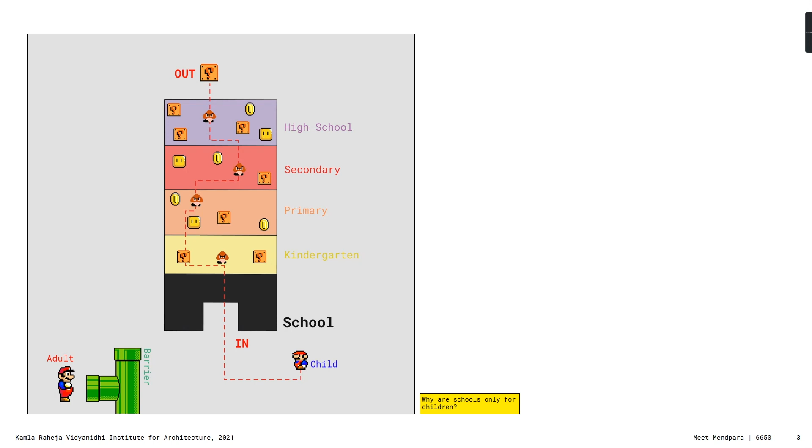The aim is to discover opportunities and access to resources that propagate curiosity to learn by turning institutions into a truly public resource. The thesis started with a question: why are schools only for children? The school is imagined as a place where everyone is supposed to go and get education, a place where you get in, pass certain stages, and get out.

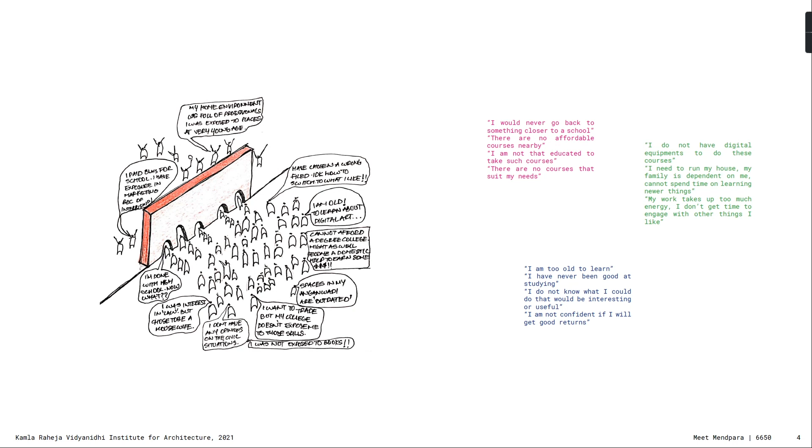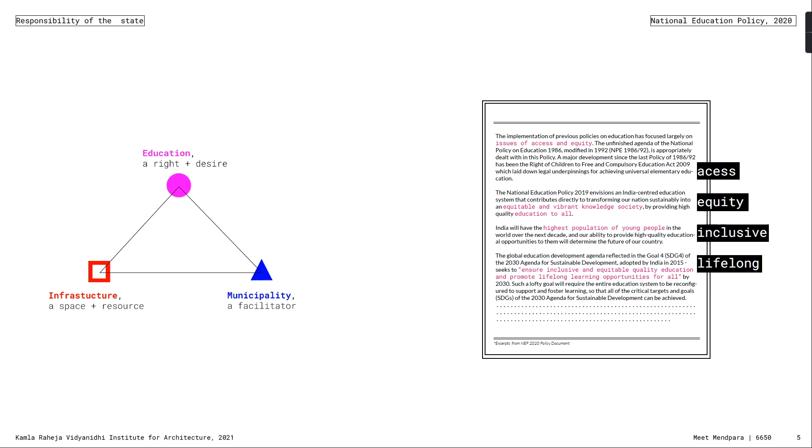The newer trend in the economy demands different ways in which we engage knowledge. While I was doing the research, the National Education Policy 2020 was announced. It basically attempts to find ways for execution at the ground level by looking at the current systems of governance.

So the municipality becomes the facilitator for providing infrastructure for learning, which currently is the public school. One important aspect taken from the policy was the idea of autonomous learning clusters formed at the scale of a neighborhood. These are imagined to be self-governing educational facilities like municipal schools, different grades of public libraries, anganwadis, and adult education centers. The facilities would be administered by the school body along with the community body, which consists of members of residents' associations, NGOs, and volunteers.

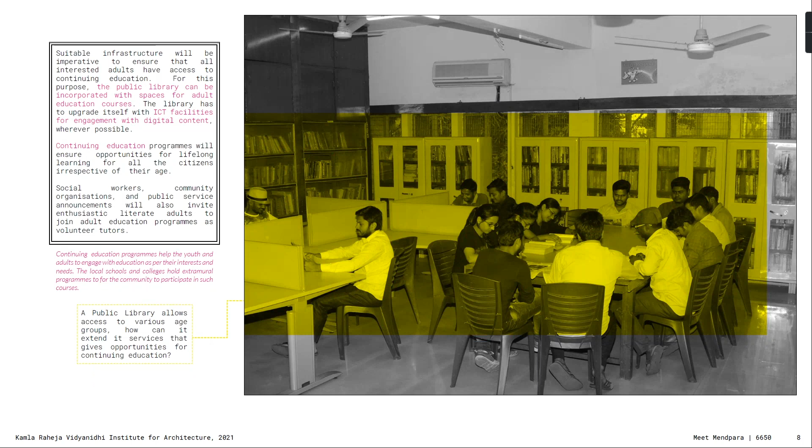As the policy further talks about the optimum utilization of these resources, how can these schools be redesigned for utilization after school hours? Similarly, as public libraries allow access to various ages, how can they extend their facilities for continuing learning programs? Basically, the policy imagines these two learning institutions to open out their boundaries to the neighborhood it's located in.

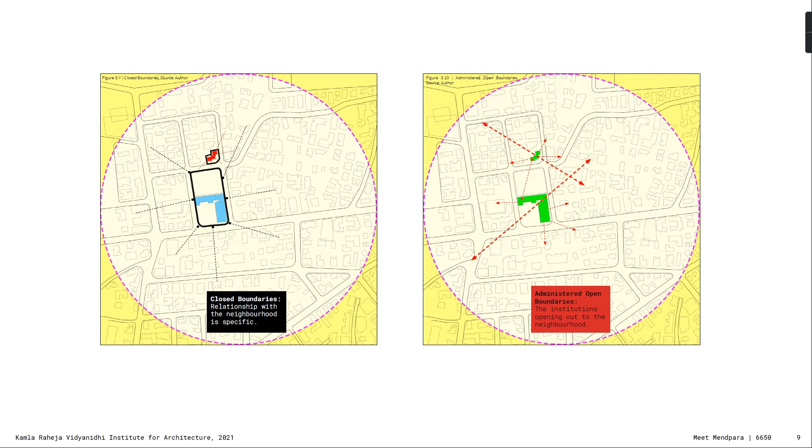Talking about the neighborhood, I started to identify these institutions in the neighborhood I reside in, a suburb in Mumbai, Vile Parle East, and documented its functioning with a critical lens.

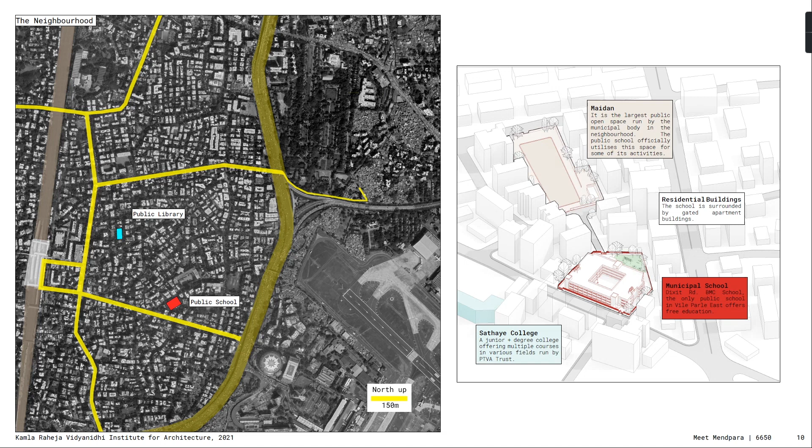The municipal school, marked in red, is the only public school in the locality, with multiple mediums of schooling within the same block. A few themes that were narrowed down were the idea of the school designed as a fortress, capsule learning, a coded machine, and the idea of power dynamics.

The school did not have any relation to the context it was located in, a series of systemic events that were carried on for a particular time frame, just like a machine.

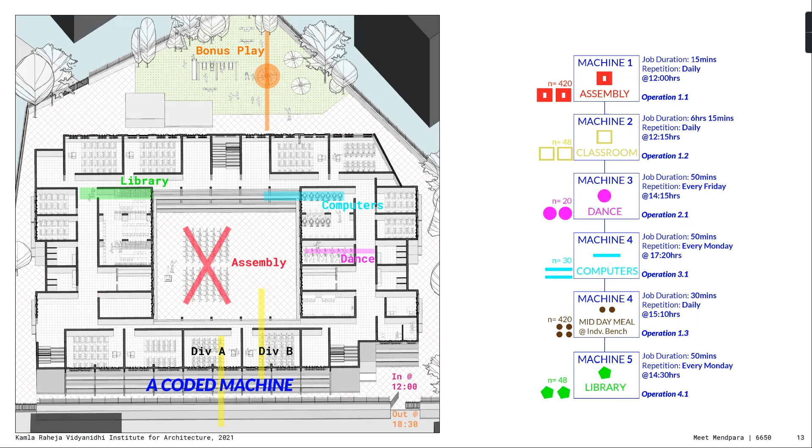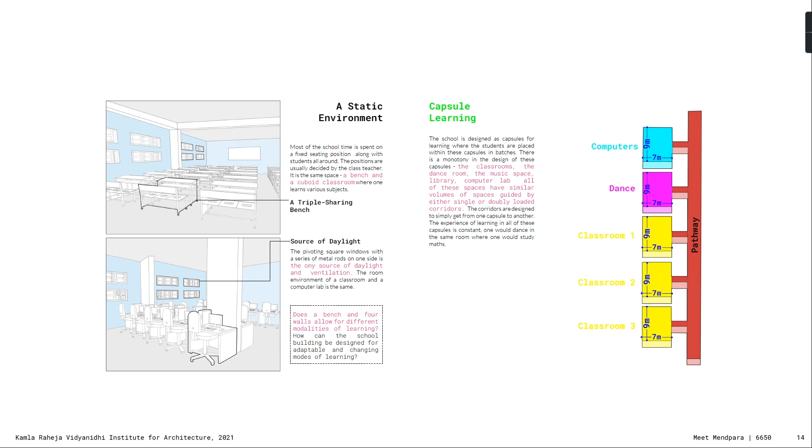The school is designed as capsules - the classroom, the dance room, the computer labs - all designed as the same monotonous space connected with a double loaded corridor. The classrooms are not designed for passive supervision but are instead always dominated by the teacher.

To conclude the study, the aim is to eliminate the divide between the municipal school and the neighborhood it's located in.

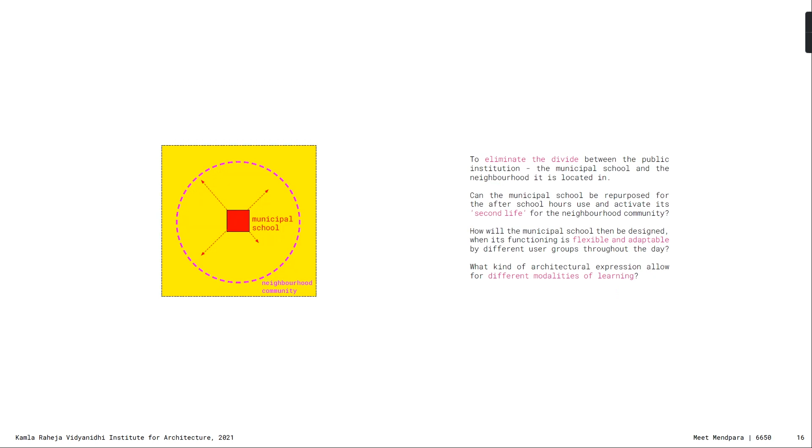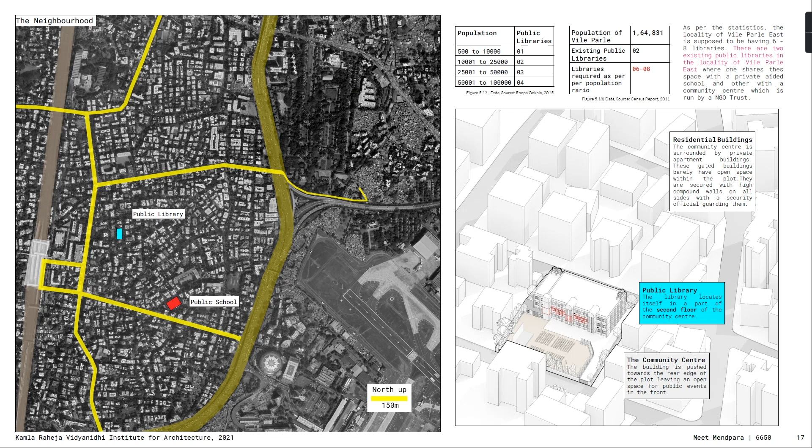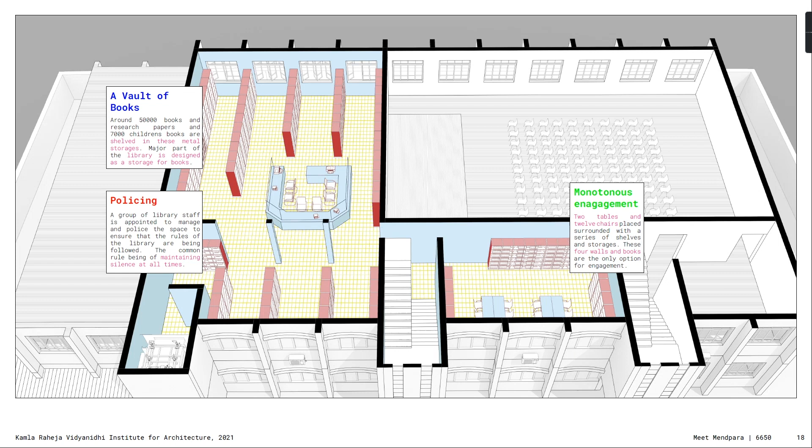The few themes narrowed down for this institution were a vault of books, where the library is designed largely like a storage space, the idea of constant policing, and finally the monotonous engagement with information. As you see, it has only one room with couple tables around, surrounded by shelves.

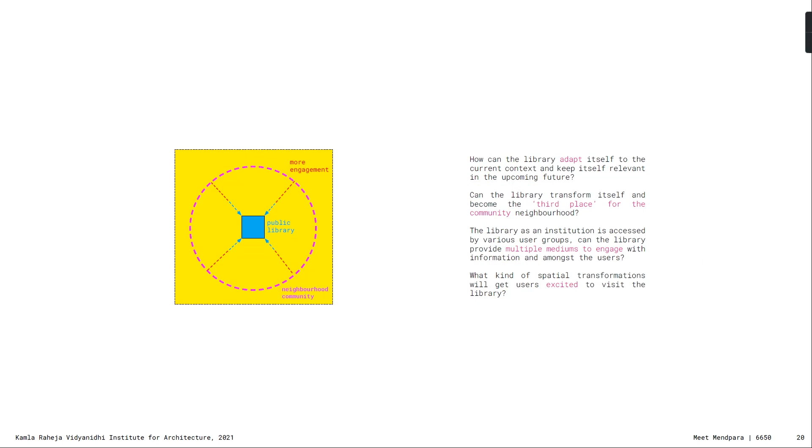So the aim is basically to transform the library to become the third place for the neighborhood, and to look at ways to keep itself relevant in the upcoming future.

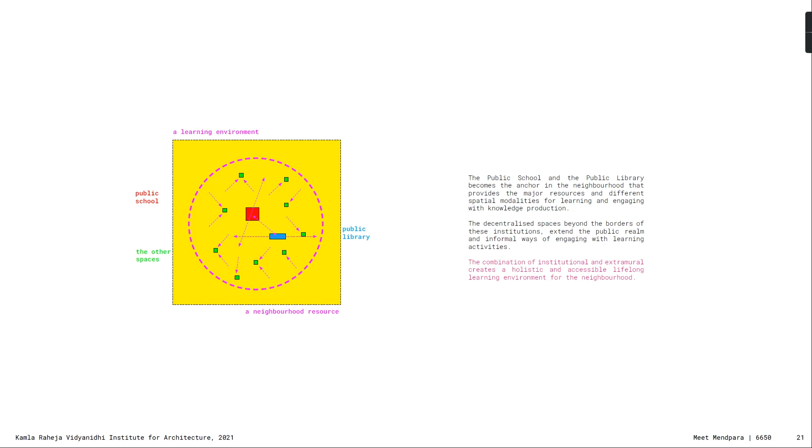Apart from these two institutions, the idea is to look at decentralized spaces beyond these institutions that extend the public realm and informal ways of engaging with learning activities. So the combination of institutional and extramural spaces creates a holistic, accessible, lifelong learning environment for the neighborhood.

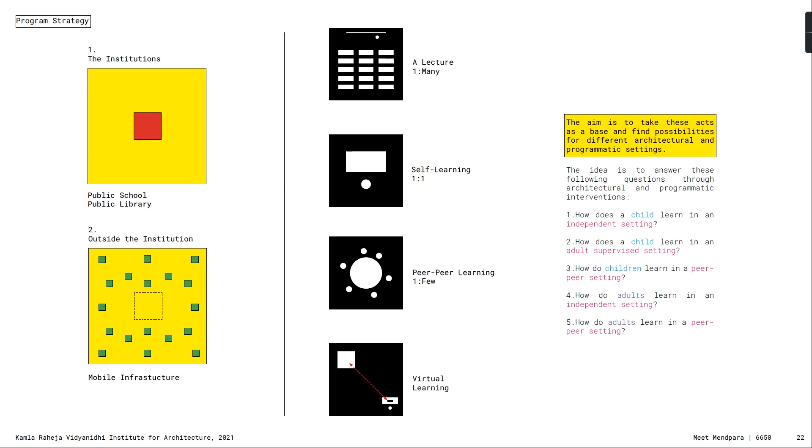The program strategy comes from the conclusions of the study that was done: one, regarding the spaces for learning, and second, the acts of learning itself.

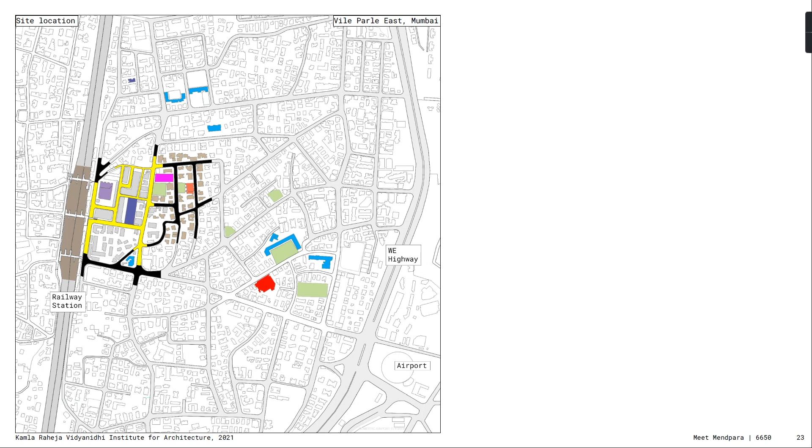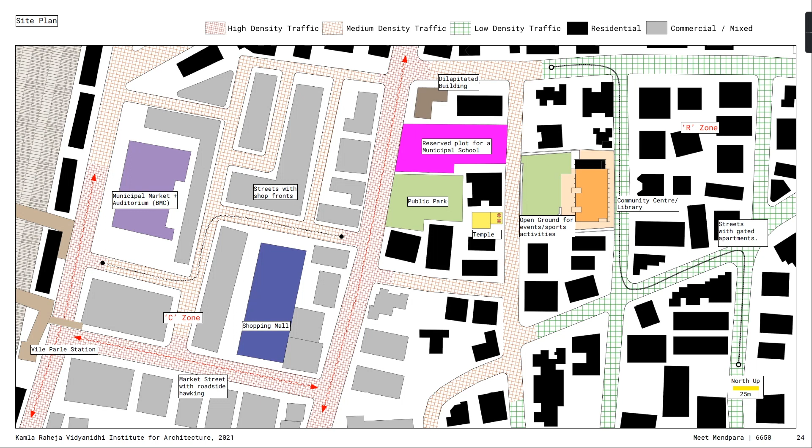It is anchored towards the railway station and the roads leading to it. The larger site context is clearly divided by the high density market street, where commercial land use is towards the station, marked in grey, and residential gated society is marked in black. The density in traffic movement reduces as one moves from the market road towards the interior roads.

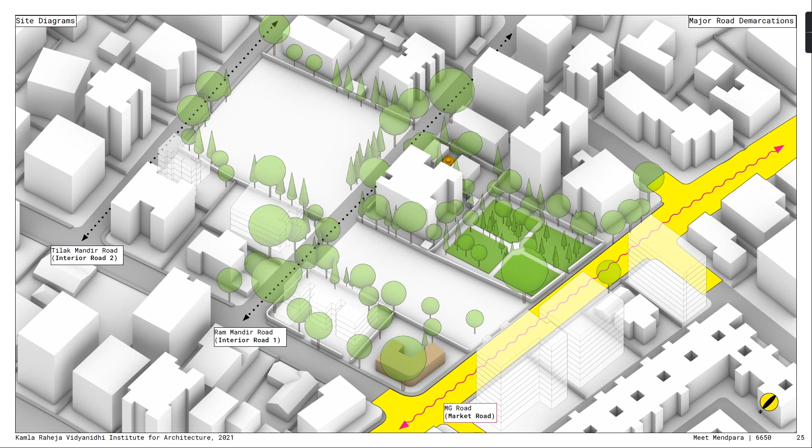Talking about the site in depth, also the orientation is changed for the diagrams. So you can see the road marked in yellow is the Market Road and the other two interior streets. The reserved plot for the municipal school is anchored along the Market Road on one side and interior road on the other. There is an existing park and the dilapidated building on the node.

The school site is surrounded by two residential buildings. Across the school site, the community center, including the public library, is located. This was the library that was studied during the research.

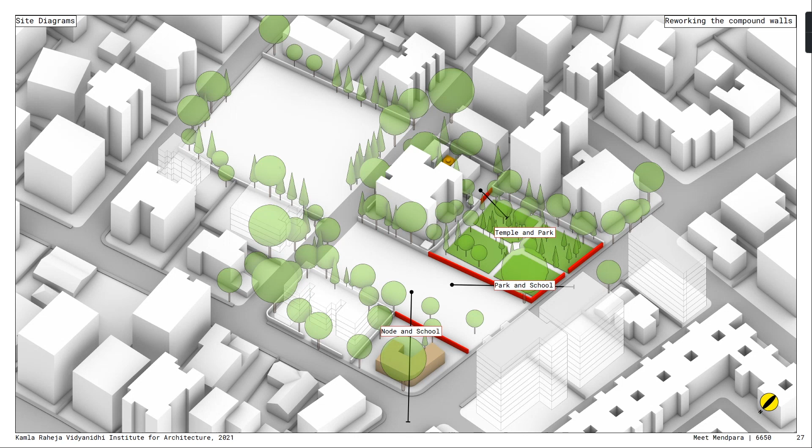Reworking on the compound walls, the idea is to create relationships from the node to the site, park to the school, and park to the temple.

The final program designations naturally happen to be the public school and the park on the plot marked in red, and public library and the existing rental halls as a part of the community center marked in blue.

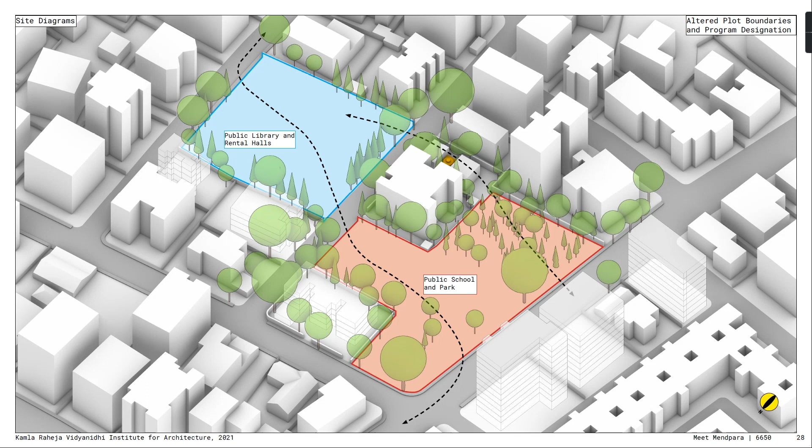The larger design move is to create a thoroughfare right from the Market Road, which cuts across two interior lanes into the residential zone. The programs are listed within three verticals: fixed, flexible, and open.

Spaces that require privacy and security, for schooling purposes, are fixed. Spaces that can be open after school hours, used by different age groups at different parts of the day and night, are the flexible ones. Spaces open for public use throughout the day are open programs.

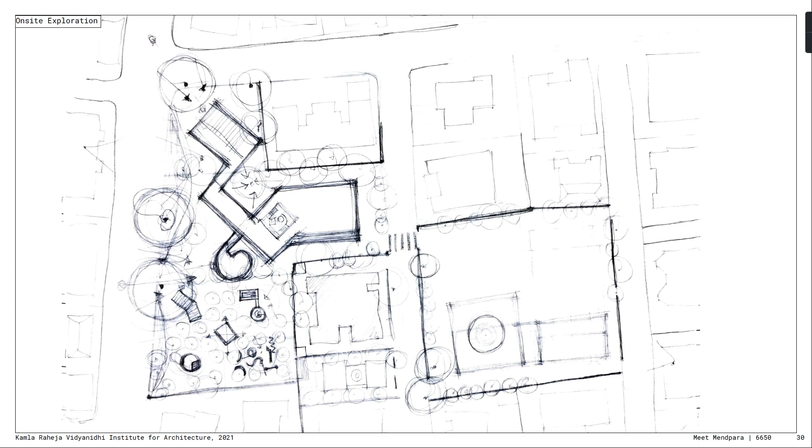Keeping the programs in mind, some on-site explorations in the form of sketches and physical models were done to understand the scale.

The idea was to basically recess the school building to the interior road with necessary setbacks while creating a public interface at the edge. This keeps a buffer between the school building and the noisy street.

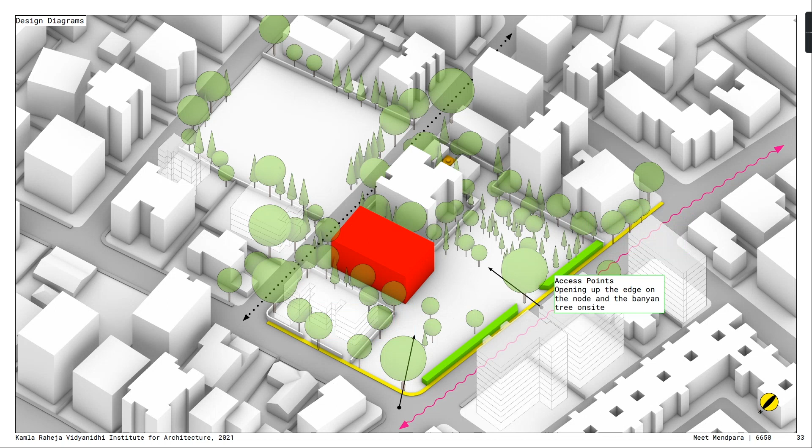Access points are opened up, one at the node and other at the huge banyan tree on site. The common program starts responding to the park on one side and the node on the other.

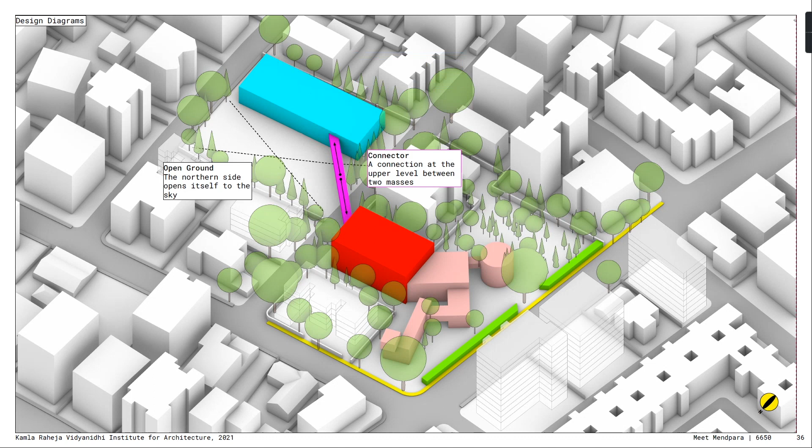For the public library, the block is aligned to the southern side of the plot, leaving the northern side open. A connection is thought out at one of the levels between the two sites, apart from ground level accessibility. Talking about the diagrams, I'll briefly talk about the larger programs in the project.

The informal hawkers on site at the edge are housed, creating a series of shop fronts accessible from the pavement.

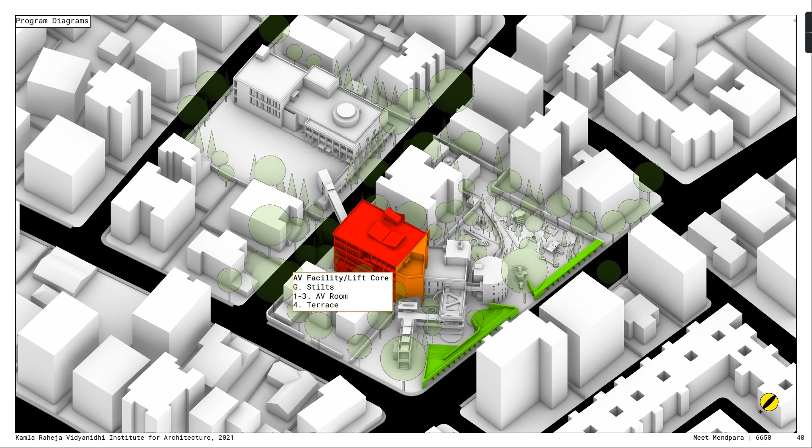The school building is sectionally divided as per the updated stages of schooling per the new educational policy, with a set of AV facilities and the lift core taking a separate bay. The commons are spaces shared by the school, like the gymkhana, canteen, children's library, labs, and an open terrace.

Anganwadi block with play school on the ground floor opening up towards the park, and on the top floor, a healthcare clinic for mothers and children.

The cyber space houses the midday meal kitchen on the ground floor, computer lab on the first, and environmental study space on the roof above.

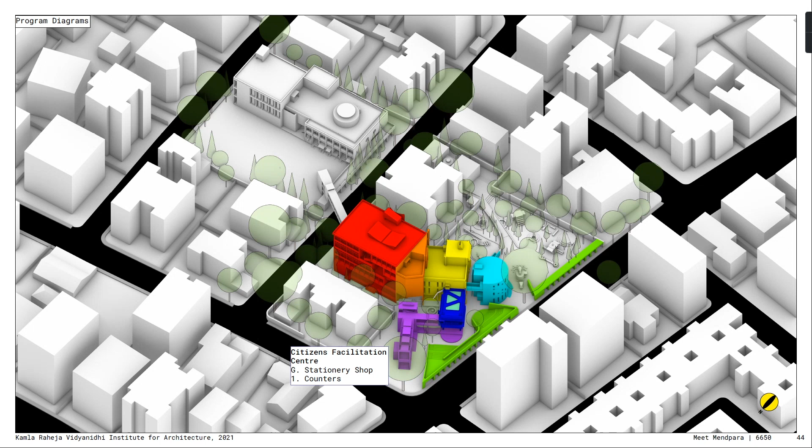Citizens Facilitation Center opens out towards the node. This program is usually at the ward offices, but the municipality also plans on making these centers more accessible for the betterment of the neighborhood.

A set of plinth work is done in the existing part for seating and a connecting ramp to the temple. A connection is made from the school to another open ground across.

It also has a walkway or a veranda that connects to the public library block. That's the public library, and three rental spaces like halls take place in the other block.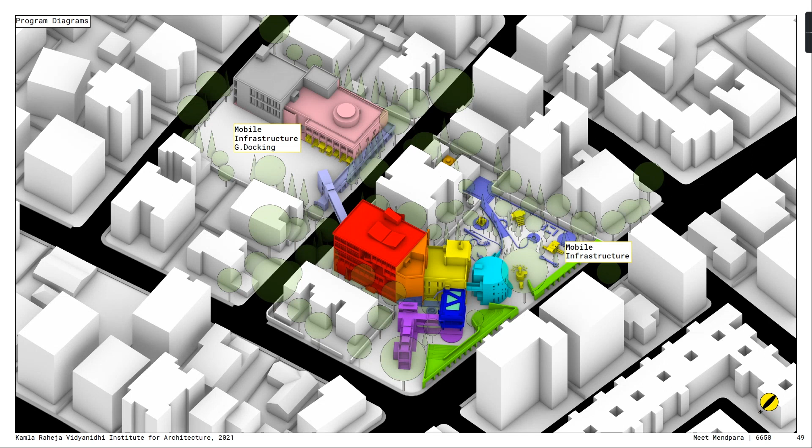The mobile infrastructure is designed to integrate itself with the facade of the public library on the ground floor, which is also seen to be placed in the park.

Talking about the plans, the orientation is north up with Market Road on the west of the plot. The shop fronts at the edge, along with amphitheaters, act as a compound wall with two large openings to the site. The ground floor is designed with a clear movement towards the public library, also in the park, along with modulation of seating and the ramp that leads to the extended plinth at the temple area. I will first focus on the school site.

The ground floor is largely stilted, and the midday meal kitchen and canteen is in the common areas open out to an internal court. At the node, there is a stationery shop along with the bicycle parking. In the Anganwadi block, the play school opens itself out into the greens and the sandpit on the other side.

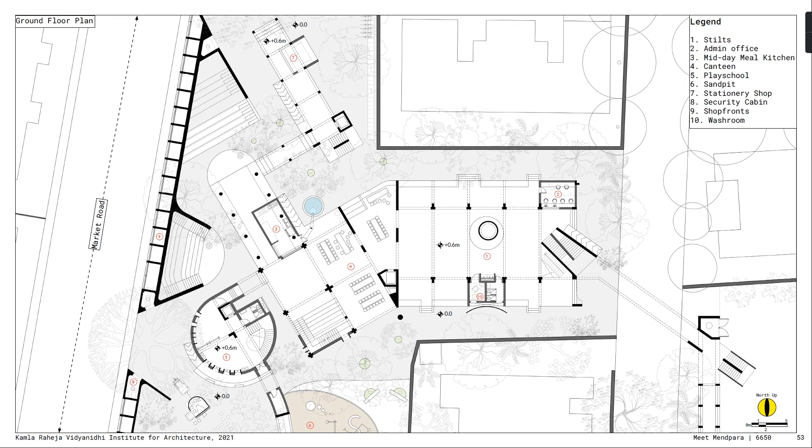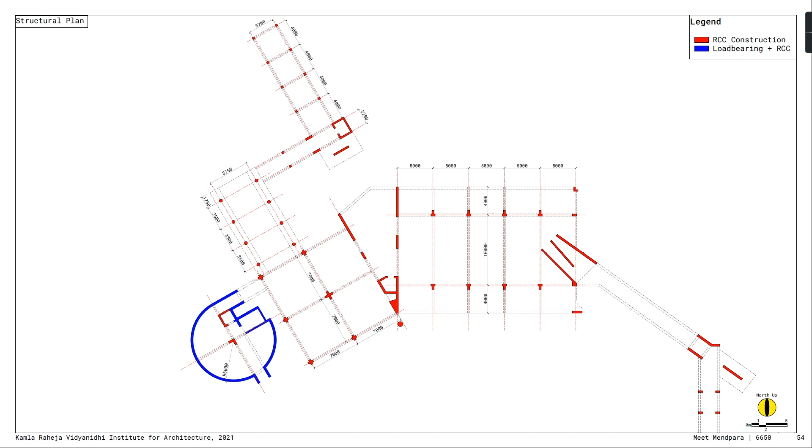Structurally, the building is divided into bays where the systems of spanning change. One in blue has a load bearing outer circular form with a column in the center to break down the span. The main school block consists of a balanced cantilever system. The AV facility at the pivot point becomes a shear construction with the heavy lift core and the fire shaft at the corner. The commons consist of plus-shaped columns with deep beams on either side. The cyber block along the EVS rooftop consists of a flat slab system with strip capitals and circular columns.

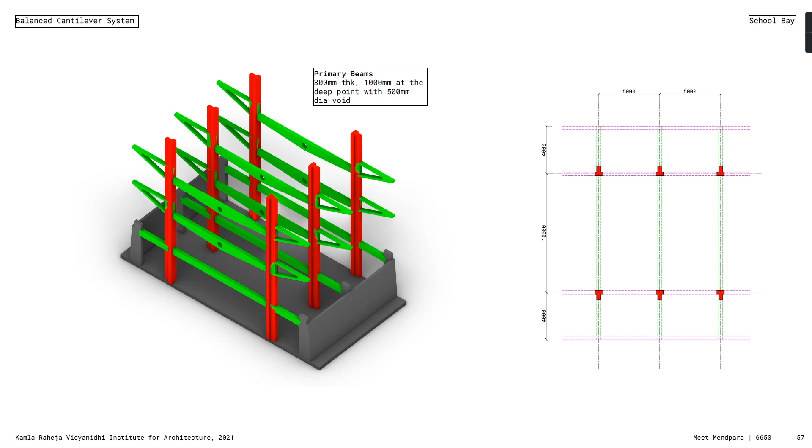Focusing on the main school structure, the foundation takes a raft footing with retaining walls. T-shaped columns help span the beams in both directions. The primary beams in RCC create a 1 meter level difference at the cantilever parts. The cantilevered areas are 4 meters on either side with a central balancing span of 10 meters. The secondary beams bind the primary ones with cross beams at both levels. RCC slabs are casted with the beams.

Coming back to the first floor plan, largely the space is used for study and other events. The children's library is imagined as a space that also opens out after school hours. The storage for books is decentralized on the floor plan as well as within the movement block at the corner. The computer lab connects itself with the CFC, that is Citizens Facilitation Center block, with a bridge. The set of counters necessary for CFC is laid out with a waiting space at the node.

Two classrooms for the foundational stage, that is the first and second standard, are placed within the Anganwadi block. The second floor houses the preparatory stage, that is classes 3 to 5. The school layout is designed in a way that alters the idea of the corridor space as just a movement function. Here, the classrooms tend to open out into the common area, which becomes a secondary space for learning and engagement. The other prominent change is in the vertical movement. Here, the staircase blocks are decentralized, so it does not become a boring continuous dog-legged staircase well.

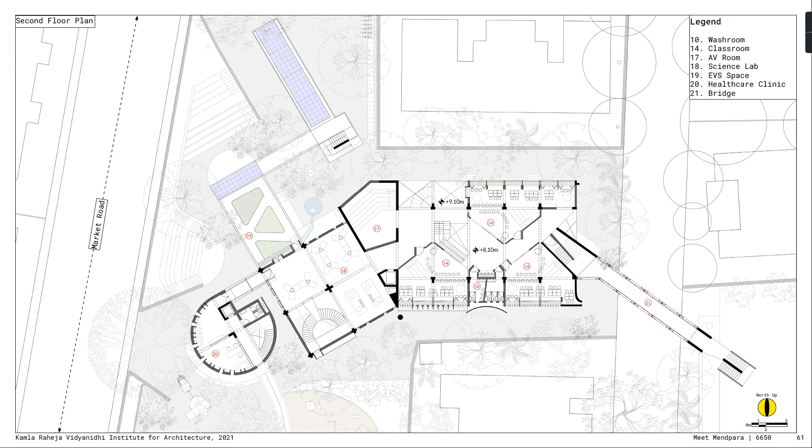The commons block holds the science labs, which opens out to the environmental study space. The water arrestor at the edge drains the water in the courtyard with a spout, whereas in the Anganwadi block it houses a clinic for inspection of children's healthcare. The bridge on the right connects to the site across.

The third floor plan houses classrooms for the middle stage, that is 6 to 8. This floor opens itself to the terraces of the common block and an outdoor seating space, learning space towards the east, which overlooks the playground. As a design decision, the larger spaces are placed on the south face of the building, where double heights and large openings are attempted towards the north.

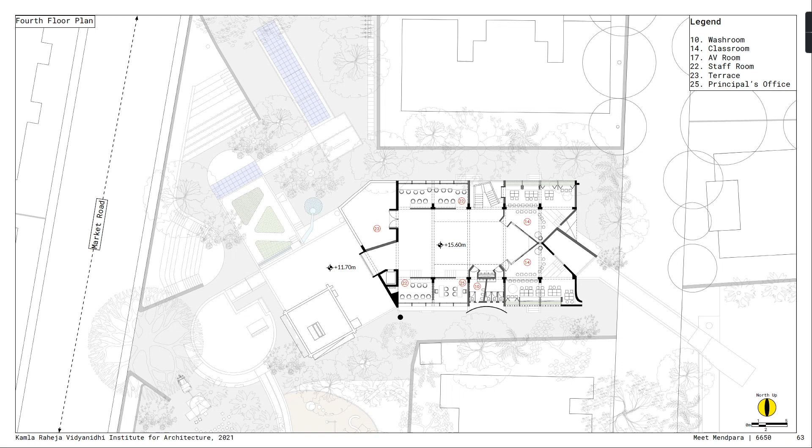The last floor houses two classrooms for the secondary stage, that is 9th and 10th. The faculty rooms along with the principal's office are located at this level. The central space is left for assemblies with modulation with the roof that gets indirect east and west light. The underground level is designed for gymkhana and study areas that can be opened after school hours. The central space with a circular light is left open with temporary furniture which can be transformed as per requirement.

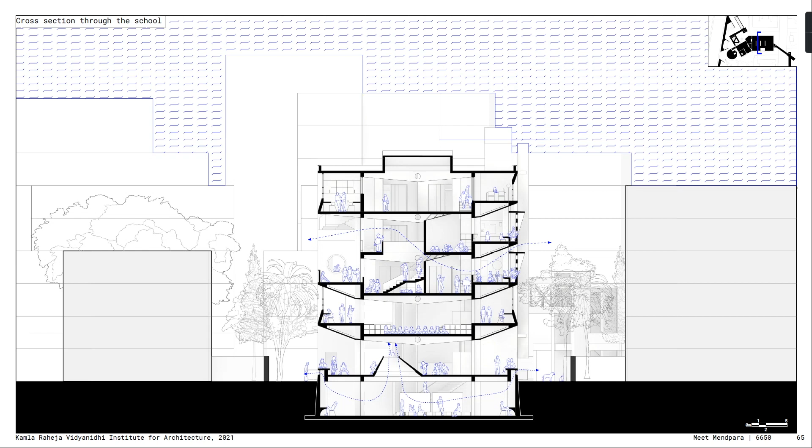So this is the cross section cutting through the school block with a series of openings towards the north face and north-south cross ventilation. The plinth edge is detailed to accommodate the ventilators for the underground space as well as the seating for the canteen at the plinth level.

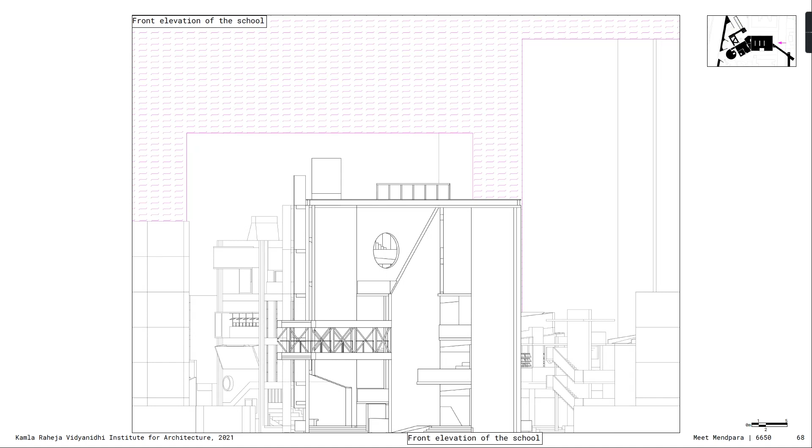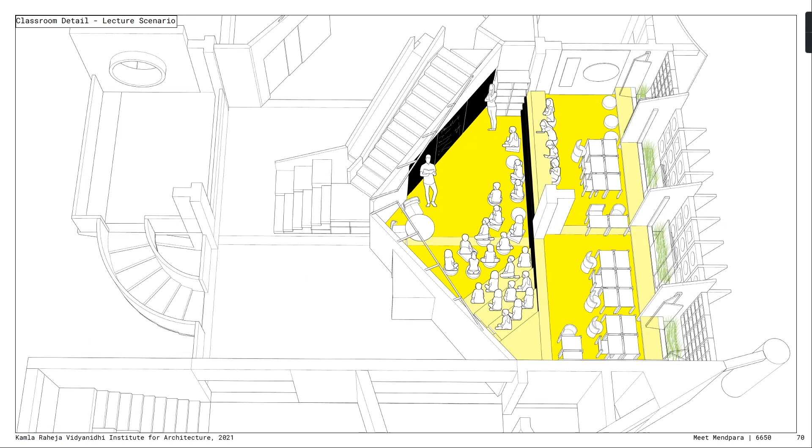This shows the functioning of a classroom, which is a lecture scenario. This is the work scenario towards the window with movable furniture. And the secondary space gets taken over during the recess hours.

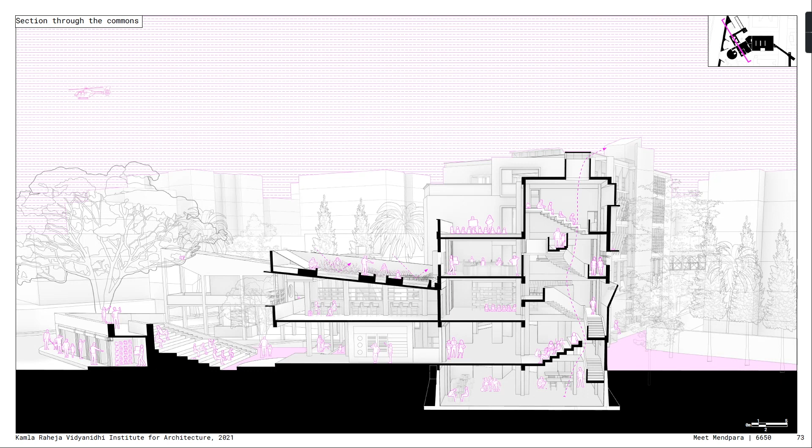This drawing cuts across the common functions, showing the edge that accommodates shops, the amphitheater, the canteen, computer block, the green roof for EVS, and the block for vertical movement.

This is the detail of the cyber block with flat slab construction, where on the upper floor the capital strip upturns and accommodates the soil within.

In the courtyard, the water collection area keeps the courtyard cool, where the water further leads to the filter bed and the rainwater harvesting tank.

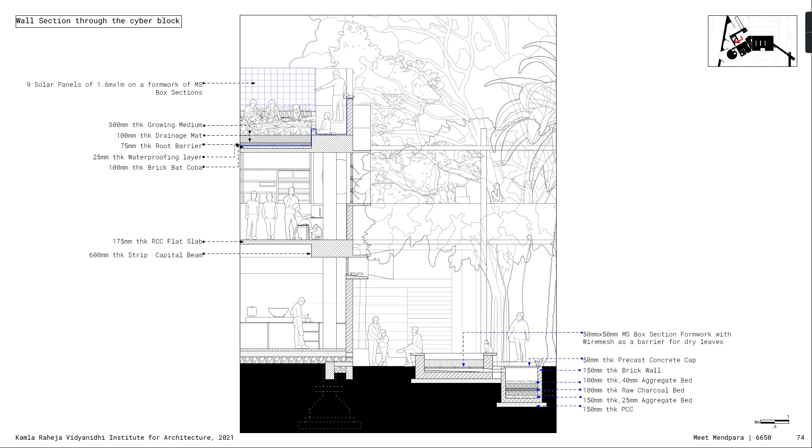Talking about the vertical movement at the corner of the common block, it creates different pause points at landings where informal activities could take place.

The openings overlook the park, framing the trees at foliage level, with some large windows becoming storage for books. The top shaft with the louvers allows hot air to escape.

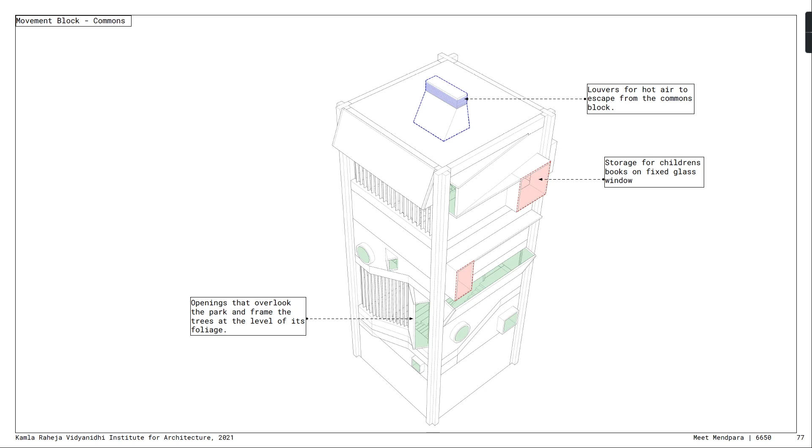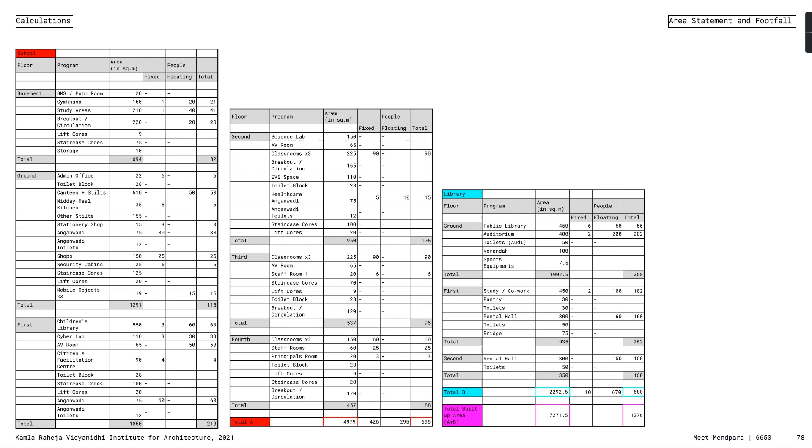The built up of the site is around 4,900 square meters, which is the school site, and the final built up of library and school both together comes up to 7250 square meters.

The solar panels are placed on two roofs that suffice almost the entire energy requirement of the school building. This plan indicates the rainwater harvesting and drainage.

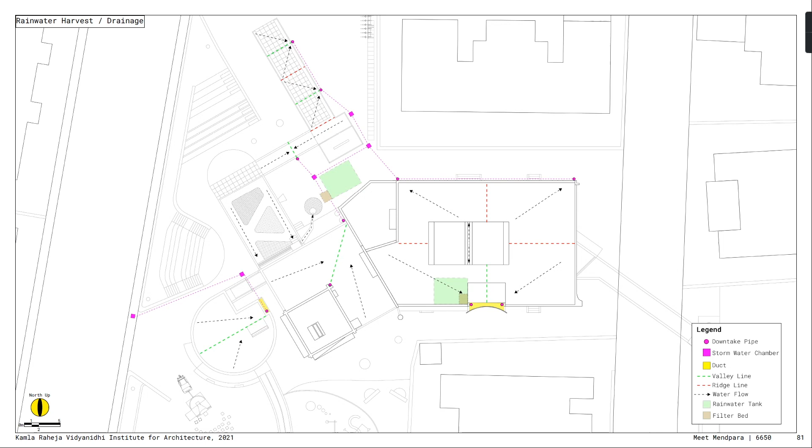Now, talking about the public library across the road, the library is designed in a way where the 9 meter circular spiral movement block, which holds the shelves for the books, the staircase, and the seating, is accommodated within.

A small lecture space descends down with a series of steps. The entrance to the auditorium is from the east.

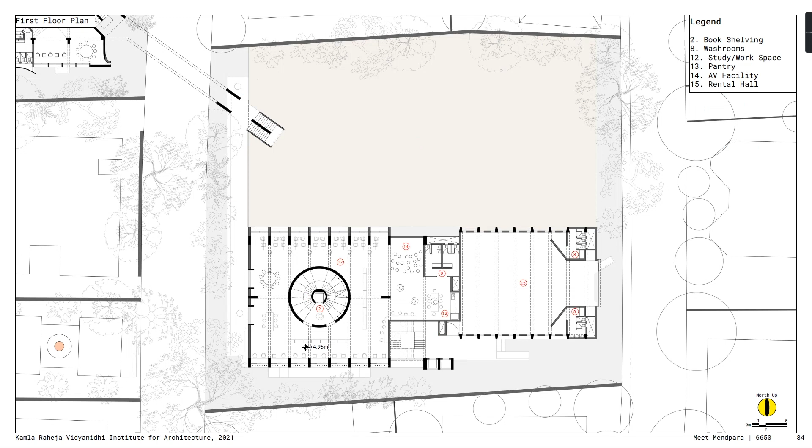On the upper level, the workspaces, a small screening space with pantry and washrooms take place. Structurally, the library block is mainly a 20 by 20 span with a series of columns on either edge.

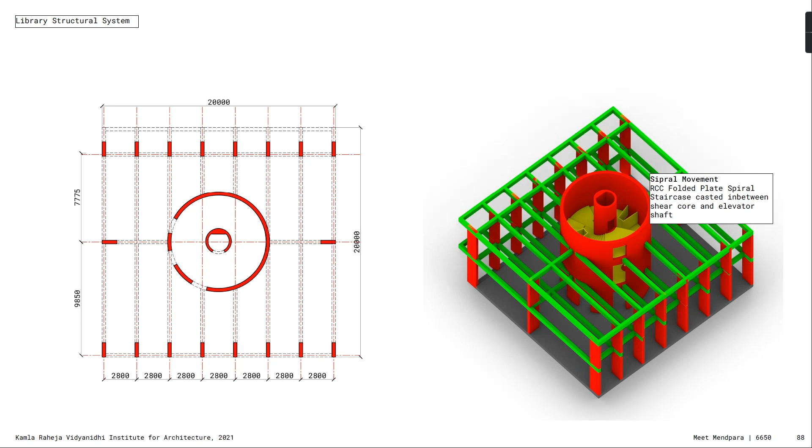The span is cut with the help of a shear circular block with a set of beams. The spiral staircase is cast in RCC between the elevator shaft and the external shear core.

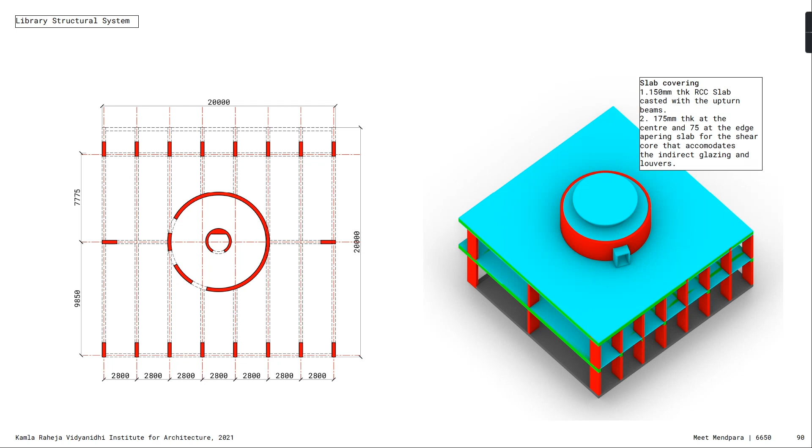At the terrace level, the beam is upturned for accommodating waterproofing layers. The slab is cantilevered from the shear core that accommodates glazing and vents.

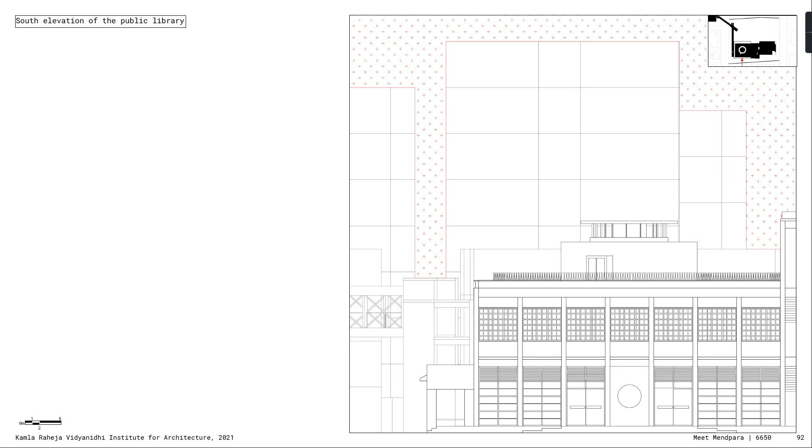The south facade consists of precast hollow blocks to modulate the harsh sunlight, whereas the north facade has large openings to capture maximum north light.

The elevation also shows how mobile models are docked at the lower level. These sections show the detailing of the edges on either side of the library block.

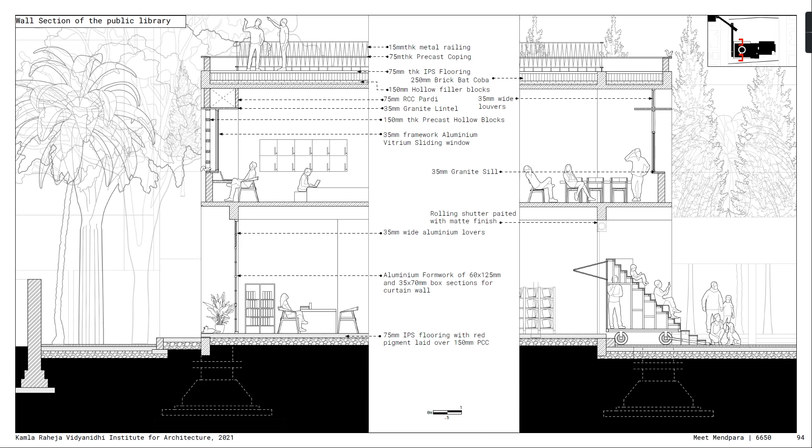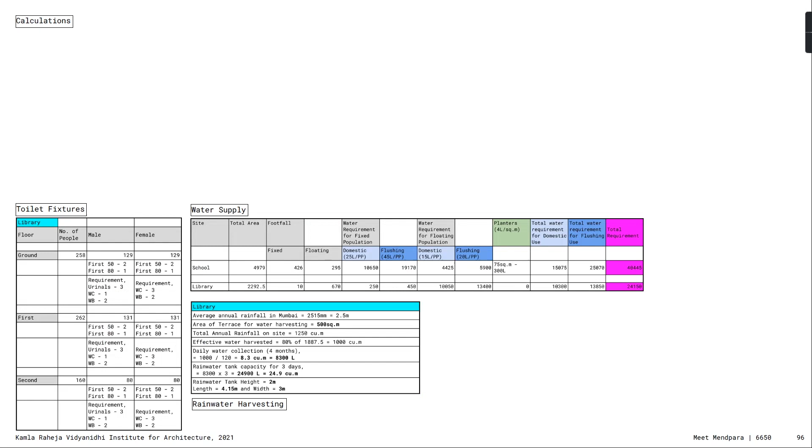Talking about the mobile models, these are designed to become part of the place they are put in. For example, a park between the trees, an extended plinth near a place of worship, or a plaza outside the railway station.

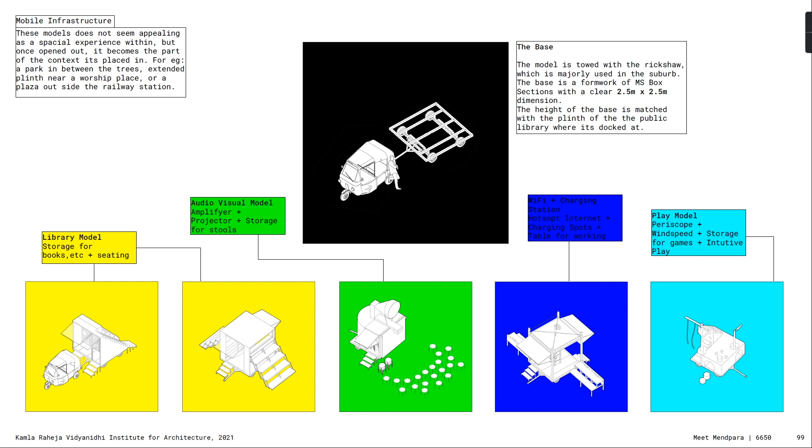The base is created with a formwork of 2.5 by 2.5 meters on which these models can be built. Larger themes were library, audiovisual, play, and Wi-Fi charging station.

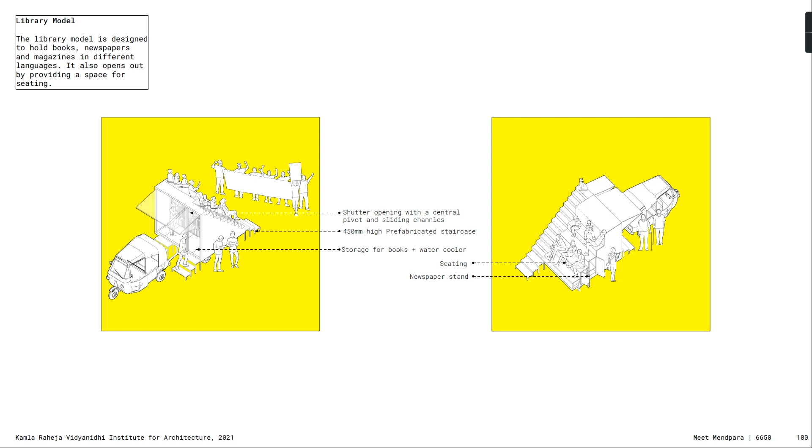This is the library model which has storage for books and space for seating. In this model, the steps unfold out and the inner storage becomes a walkthrough.